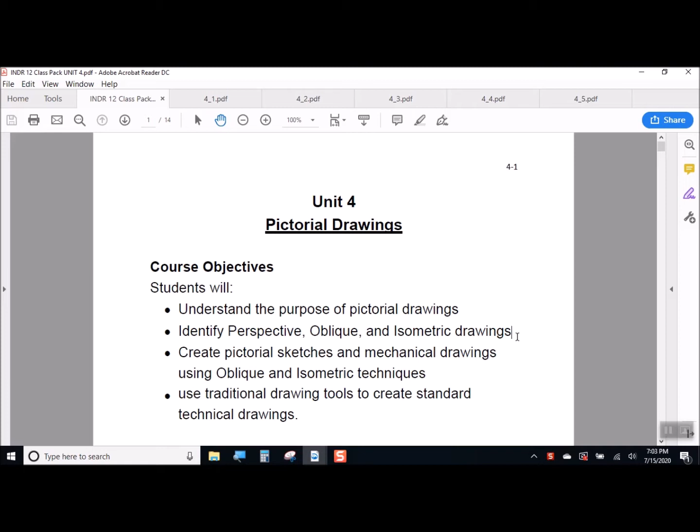So after we have reviewed all of our information and we've done our oblique drawing practice and we've done our isometric drawing practice by doing some sketching, we have a chance now to take care of our assignments. So if you go back to the back of the course pack and you go take a look at the heavy paper drawing assignments, we're going to see what we have to work with, and we can talk about how to accomplish what we're trying to do here.

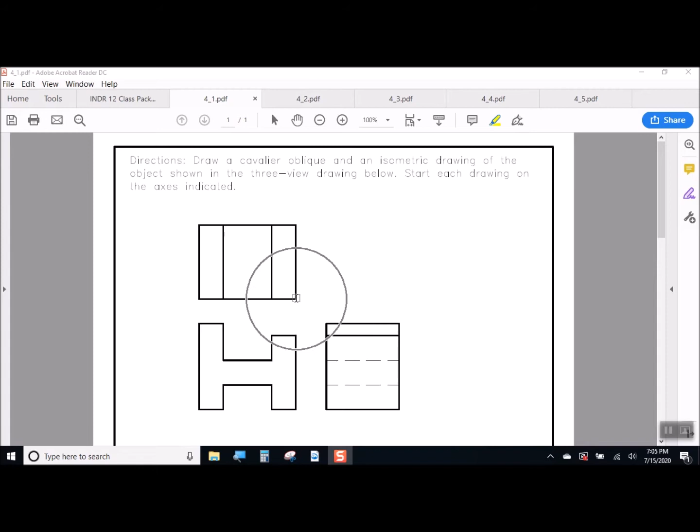So here's drawing 4.1. Drawing 4.1 involves you making a Cavalier oblique drawing. And Cavalier oblique, you might remember, is depth 100%, full depth, right? So from the front to the back, whatever that is, we're going to draw it at full size. So you see this shape here? Looks like a letter H, doesn't it? It's a little bit higher on the left than it is on the right, but basically it's flat along the bottom. And it's got a little notch here and a little notch over there. Here's our top view, here's our side view.

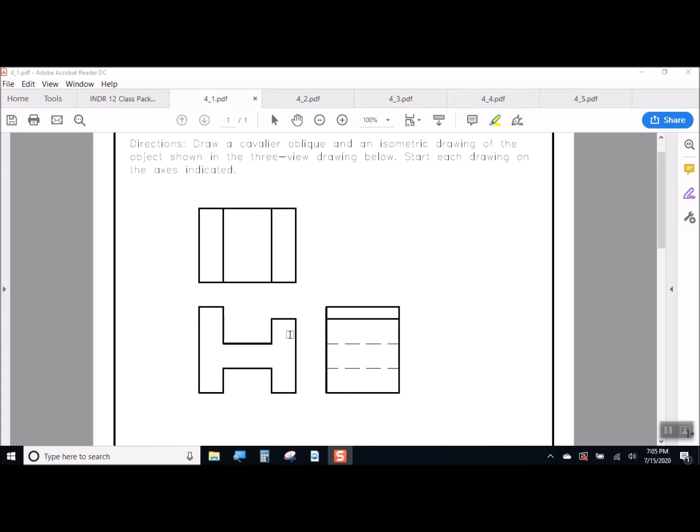What we want to do is we want to recreate what we see. So we're talking about oblique drawing. What are we going to do? Well, we're going to go down to the bottom of the page, and do you see where it says Cavalier oblique? Start right there on that corner. That will be the bottom left corner of the front view. And what you're going to do, of course, to create an oblique drawing is you're going to redraw this shape just the exact size that it is down here.

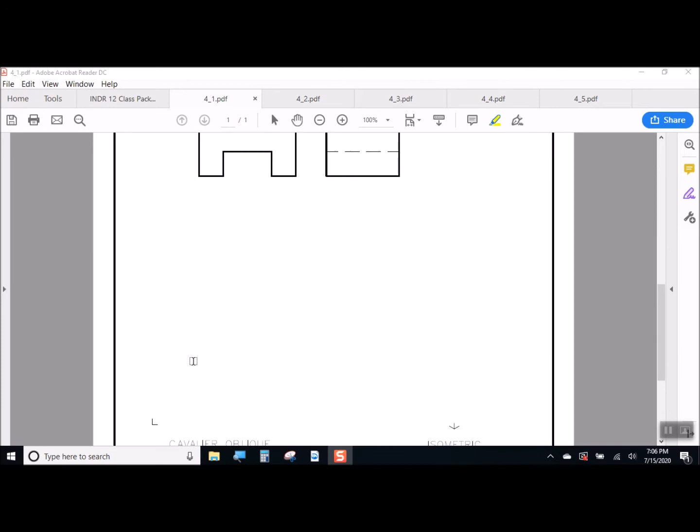Okay, so now how can you get the exact size the same? Well, a couple of options. You can measure it with your scale and work your way around, or you could use your dividers, right? Set the point of your dividers on each end, and then you'll know how far over to go as you were drawing the shape out. Okay, but basically when we're done, what we're going to have is a front view for our Cavalier oblique, and then you are going to do the magic that turns a flat front view into an oblique drawing. And again, because it's Cavalier oblique, you'll be going full depth from the front to the back.

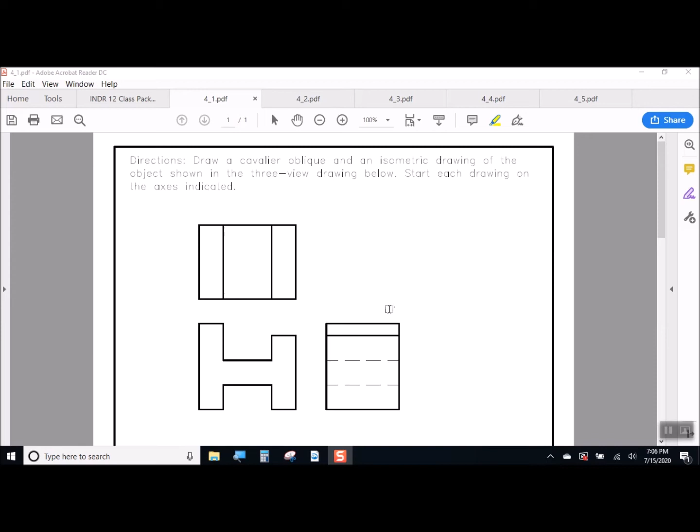Next assignment is drawing 4.2. On drawing 4.2, similar idea. You're going to draw an oblique drawing using this multi-view drawing as your guide. That means use the sizes you see here. However tall it is here, well, that's the height. However wide it is here, well, that's the width. And however deep it is from the front to the back, well, that's the depth.

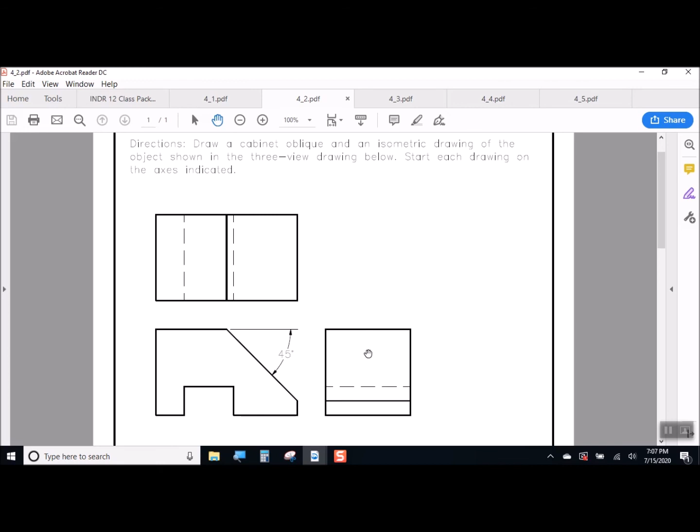Now, understand that this is a cabinet oblique drawing. What does that mean? Well, it means you have to go full height, full width, half depth. Right? We're going to cut the depth in half. So, what do we do? Well, this corner down here, the bottom left corner of the front view, will be right here, where I'm giving you that little starting point to work off of, okay? So draw the front view, including the angle, and then you do the magic to turn that front view into an oblique drawing in Cavalier and cabinet style.